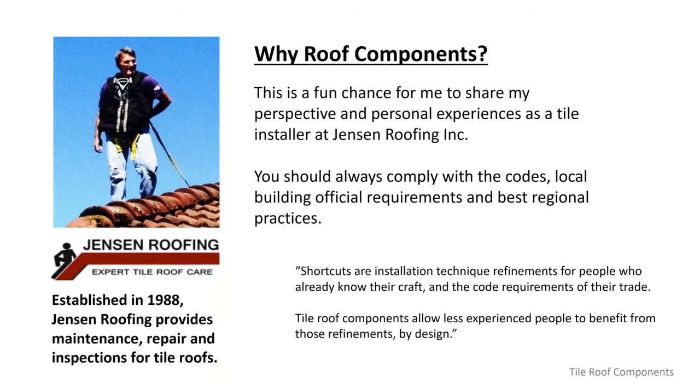I actually adjusted this presentation a little bit because of the level of experience and knowledge that we have here. I don't want to be rudimentary, but I do want to share some of my insights.

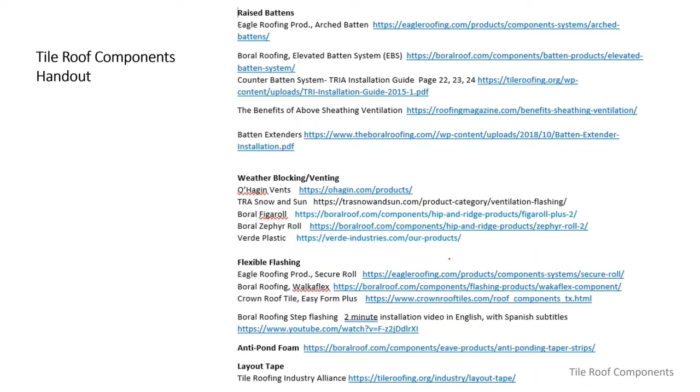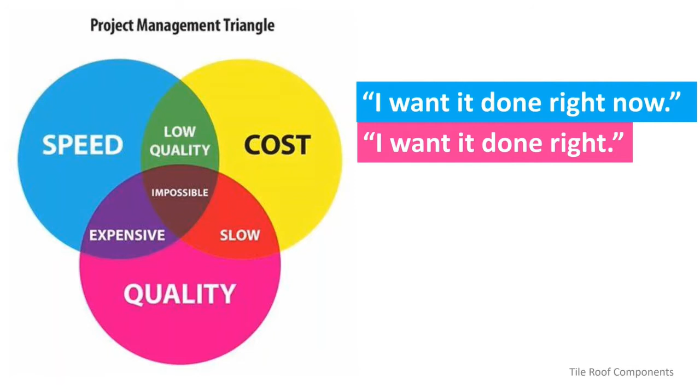So we're going to take an approach looking at the project management triangle, and the rule of thumb is that you can get 2 out of 3. It's speed, cost, and quality. So that means if someone says, I want it done now, they're making their two choices. They're saying, I want speed, I want it done now, but I also don't want to pay a lot. That means he's going to get a low quality outcome. He's going to get it fast, and it's not going to cost him a lot, but it's going to be low quality. We might say, I want it done right, and I want it done right now, which in this time is a very tough ask. But the reality is, if you want it done right and you want it done right now, it's going to be expensive. The cost is one thing you won't be able to control as easily, but you're going to get a good job, you're going to get the quality.

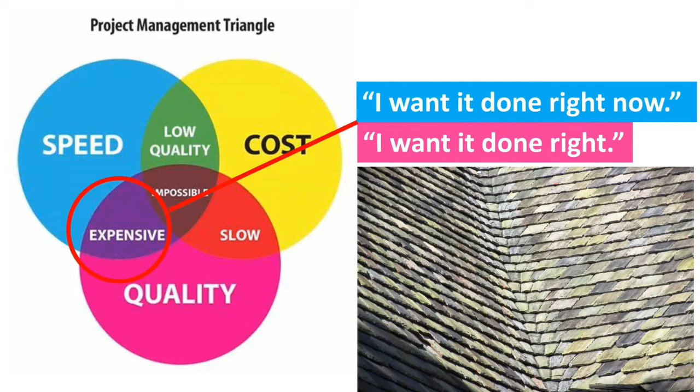That is a Ludowici roof on Duke University, a fantastic job about 3 years ago, down in Raleigh, North Carolina. So when it comes to tile roof components, we say that they enhance the quality of the roof by increasing the function and longevity. So when we use words like quality, function, and longevity, we're obviously in the quality component of the project management triangle. We're talking 100% about the benefits to the building owner: longer life, lower maintenance, energy savings, improved aesthetics. There's all kinds of benefits that come with tile roofing components.

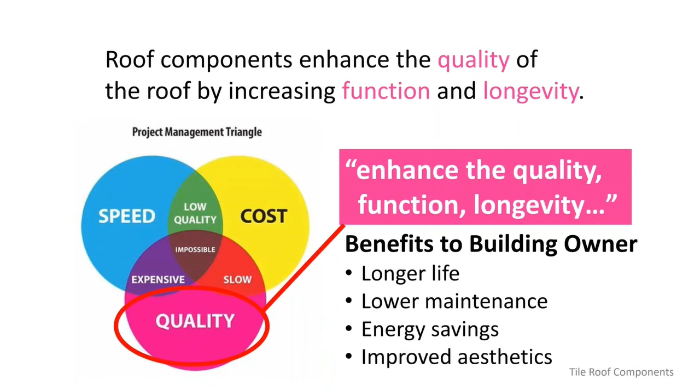The contractor and maybe even the homeowner will look at this project management triangle and say, well, you're telling me we're going to provide quality, function, and longevity. That means it's either going to be expensive, or it's going to take more time, or it's just going to be impossible to deliver at the speed and cost that this person wants.

What I want to show today is that that's completely wrong. And the reason it's completely wrong is because we're only looking at that project management triangle and the equation from the perspective of what we're delivering to the homeowner, which is really great. I don't mean to ignore that today, but what I want to do is talk about us.

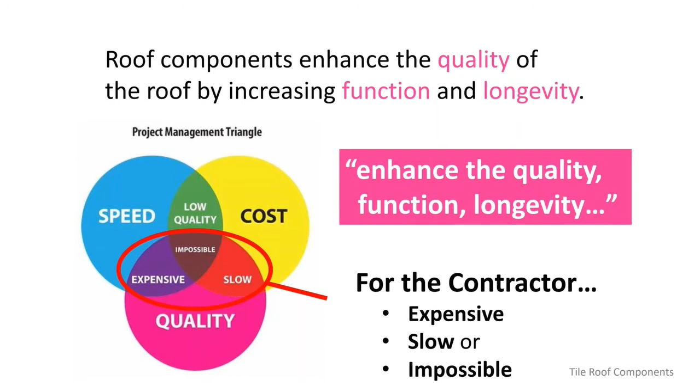And when I say us, I mean the tile roof contractors and installers, and speak to how components help us with the ease of installation, reduce the number of callbacks, can help us standardize our practices and training within our company. It provides us line items for our invoices, for increased billing when it comes to our repairs and sometimes our actual, complete roof installs.

And then if we make a mistake on the roof, if we have a problem, the mistakes are not going to be as painful because the tile roof components help compartmentalize and help facilitate avoiding damage on the roof.

There was a recent Roofing Contractor magazine article, a focus on labor. And if you ask anybody today what the biggest challenge is in construction, let alone roofing, it would be labor. We can't get enough labor. We can't get experienced labor. And second is probably supply chain. So what we're saying in the roofing industry is we can't find people to put on the products we can't get. It almost is a problem that cuts itself out of being a problem.

But in looking at Soprema, they were the sponsor of this. Now, Soprema is a commercial company, but there was something about part of what they said. I highlighted the words that I thought were important to our component talk today. I pulled them out, and I added 2 words at the end: The labor shortage is why creating products that provide time and labor savings, that combine steps, providing simpler application methods to eliminate excess labor, and my add is smart.

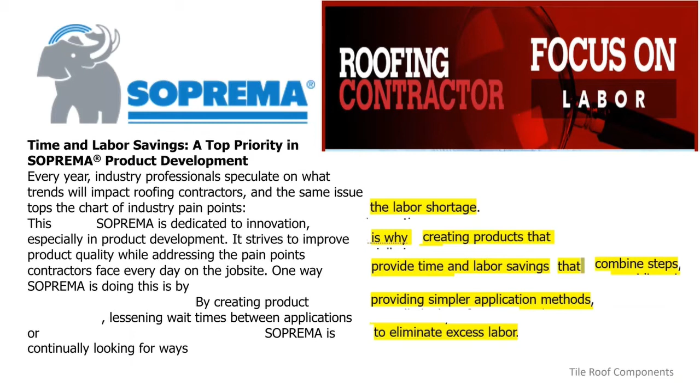That's what we do when we buy components. We're actually buying the reduction of labor needed. And so they make our life easier. It also makes less experienced labor capable of doing work that we want done up on the roof.

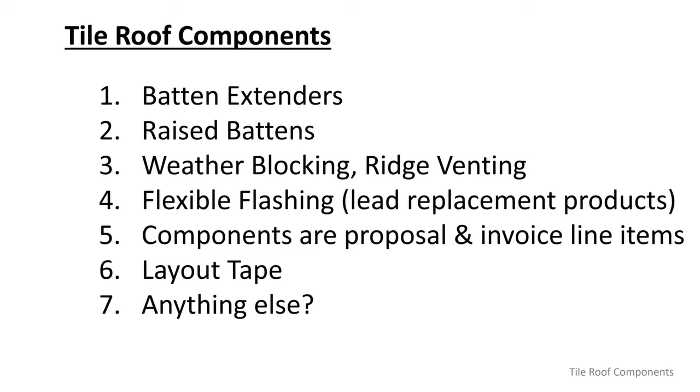So let's rip through some of these components. We're not going to see all of them today, and I hope you'll add ones you think are important and send those to us. But we're going to look at batten extenders, a raised batten system, weather blocking and where we can do ridge venting, flexible flashing, which is really common now, replacing lead as a component in roofing and tile roofing. Components are both a proposal and an invoice line item. We'll look at that. Layout tape, something that can speed up layout and make it a little more, ensure a better outcome. And then anything else from you all, use that question feature on the GoToWebinar.

So first, let's take a look at batten extenders. And these components are not in the order of value or importance. They're in an order that I just thought for less experienced people, we kind of see a progression. But again, we've got a very experienced group of people on the line today.

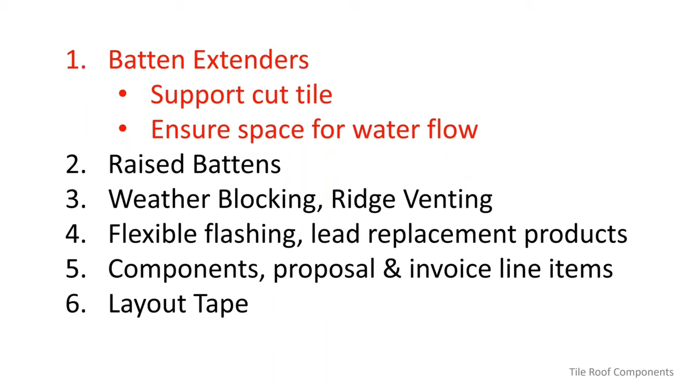So batten extenders, what do they do? They support cut tile, and they ensure space for the water flow underneath the tile. So if we look at what would be maybe a typical installation in Southern California where there's no battens being used, we've got a low profile tile with a continuous lug, and we've got a pan flashing that's designed to run the water down the roof and encapsulate it in that pan flashing until it gets to the gutter.

Well, this tile and that pan flashing have a problem with each other, and what unfortunately happens a lot is a roofer might just smudge, push, crunch down that raised hem on the flashing. That's very important to facilitating the water getting off the roof. So obviously we don't want to do that.

Other times the roofer may take his hammer, and I've done this on new construction when we're dealing with fresh new tile, you might take your claw hammer on a framing type hammer and chunk out the weather check on the tile. I've reverted to cutting. We've seen issues where we can put fracture lines or fractures in that tile that they'll develop later and be breaks.

So once that tile is down where we want it, we're able to put a fastener through that pre-punched hole in the tile. But when we get to our second row, now we're looking upslope, you can see that our offset tile, our half tile, if we put a fastener in that hole, it's going to go right through the pan flashing, and we can't do that.

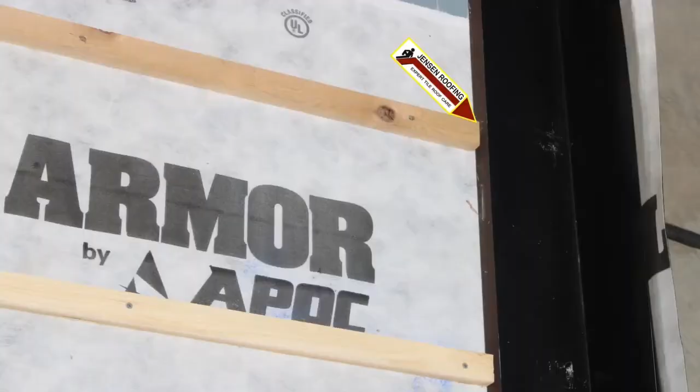So we're going to have to wire tie that tile, or do something to secure it so it doesn't slide in that pan flashing. Even if we're using 1x2 battens on the roof, we still can't run those battens right out into the pan flashing, so we're still dealing with figuring out how to attach that tile. Sometimes we'll use adhesive, concrete adhesive, or concrete and clay adhesive.

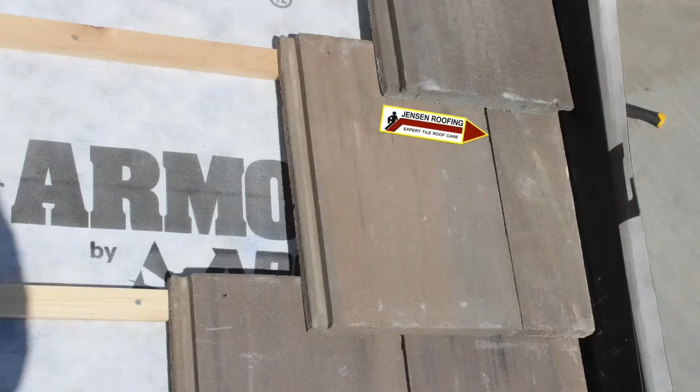But you can see that the tile is still drooping, so it's going to fight against making a good connection there. It's going to be a little bit disheveled, and eventually it may slide. If the adhesive doesn't make a good bond before the tile is set, it may slide down, and then Inspector Paul will be pointing that out in his reports.

Another challenge with the cut tile, which we see at the sidewalls where they need to be supported, or at the valleys, is that once you've cut a tile, it's a lot harder to use any kind of a hammer or slate tool to chip out the weather check. You're more likely to break or fracture the tile, so at that point you often have to cut them to do that.

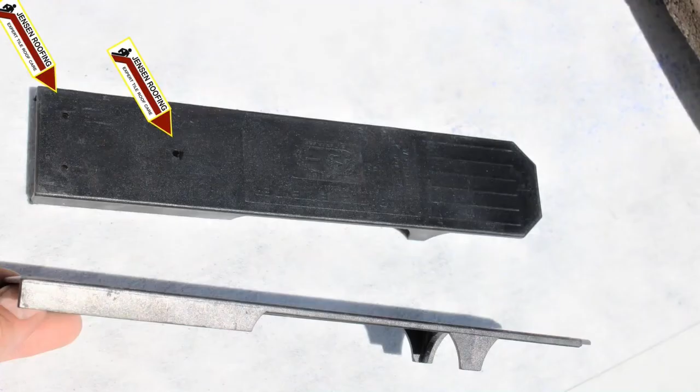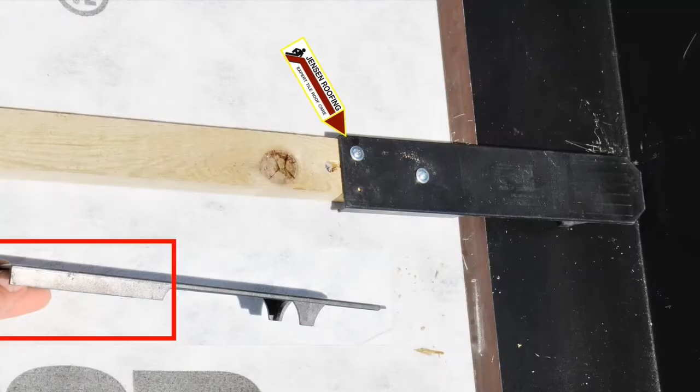So one solution is a batten extension or a batten extender. If you look at this one, you see that there's actually 3 pre-drilled holes in the batten extender. This is a 10-inch batten extender, and the first several inches are kind of a U shape, and that U shape fits over the top of the batten. I typically put a fastener in 2 of the holes and fasten it over the top. You can see from the side down in the red box how that U shape fits over.

And then the extension goes into the pan flashing, and there's a couple little legs that keep the plastic part of the batten extender up in the air. When we set a tile on it, the lug is able to fully engage on that batten extender, so we don't have the same problem with sliding. And if we were going to use adhesive to bond that to the adjacent properly fastened tile, that tile is going to be lifted up in a position where that adhesive will make good contact. Clearly you can see there's plenty of space for the water to flow underneath the tile.

So that's a 10-inch batten extender, and we've also got 18-inch batten extenders made for our valleys. They're the same, just longer. Again, you can see that we're installing a concrete tile on a 1x2 batten, and the batten has to stop at the flashing, and the tile then actually droops into the valley trough. As you roofers know, this is the easier side of the valley where the underlock of the preceding tile helps support our tile. It's even more challenging on the other side where we're coming out of the valley and those tiles just want to drop flat down into the valley.

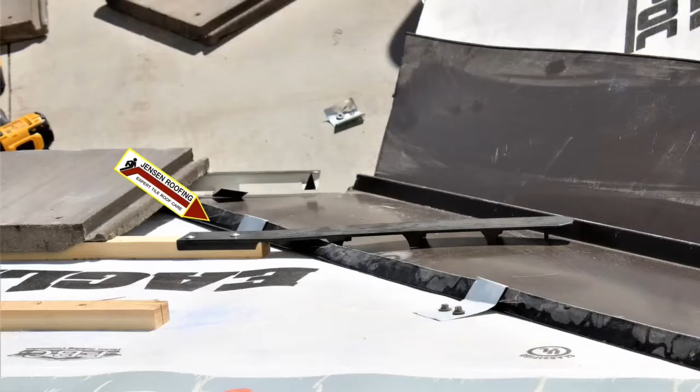So if we install a batten extender, same 2 fasteners that we used before on the sidewall, extend it out into the valley flashing, the little feet and legs keep it up in the air. The 18-inch extends right out to the center of the valley, and then we can put our tile and rest it on that. You can see the nice even plane of the surface of the tile. That's going to make a difference in the aesthetics from the ground on all of that tile. In addition, you can see the cavity between the flashing and the bottom of the tile, so we're not going to have the same issues with the blockage of tile.

For us, it's very common on that standard tile valley with the hem or the return, very common in the Northwest, Oregon, Washington, and Idaho, where tile roofs were installed with low profile tile, which is very common up there. And now we're seeing low profile be more common across the country, that modern look.

So we get a call for a leak repair and go out and find that there was nothing done other than the valley tile just laying there in the valley. So our role in a repair like that is we go out and we solve the problem. We find the blockage, we'll replace, pick up the tile, clean it out, and install maybe 3 or 4 rows of batten extenders. We'll send the homeowner a picture like this. Maybe we'll throw in a debris screen if there's a tree around that helped contribute to that.

But now we're going to solve that problem for them immediately. We've got our repair call, our service call, and we charge them for the products that we installed. Then we'll send them this picture along with the invoice and tell them, tomorrow I'm going to send you a proposal to finish that valley all the way up the rest of the 20 feet and the other 4 valleys on your roof. We'll give you a proposal if you want to upgrade that. The pictures we'll send will be the debris blocking the valley, the debris cleaned, and the batten extenders installed.

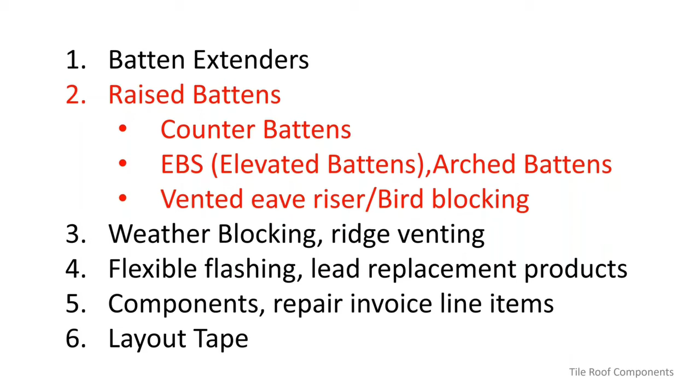So we're going to look at counter battens, which raise up the horizontal battens, the EBS, the boral elevated batten system, arched battens, which is the eagle system that allows the same type of airflow, moisture, and condensation to run downslope. And we'll look at some of the vented eave risers and the bird blocking at the eave.

So first, if we look at the TRI manual's low slope ventilated eave roof eave detail, you'll see that there's a lot of components or parts to that system. We have it under low slope because under 3:12 it'd be required to have a counter batten system or a raised batten system. So in the Northwest, we see a lot of lath put down vertically with horizontal 1x3s or 4s. And those systems actually do pretty well.

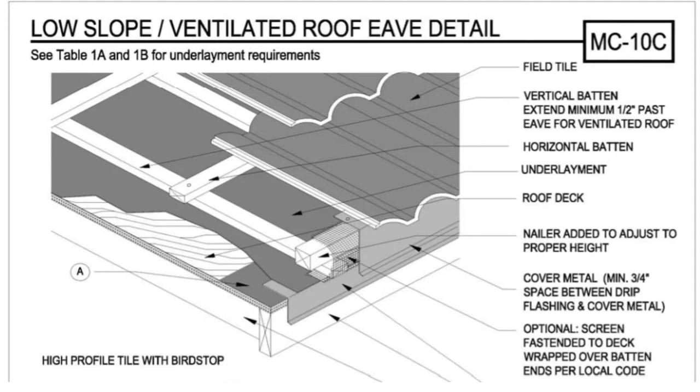The airspace is very helpful. But you're installing verticals, you've got horizontals, you've got the little eave detail where we're bringing the air in. There's really 3 components to a raised batten system, which encompasses raised batten, counter battens, EBS, arched battens - anything that takes those horizontal battens up off of the roof deck, blocking water flow.

We've got our air intake to draw air in. We've got our exhaust to allow that air to exit up at the top. That creates convection, so we get airflow underneath the horizontal battens and underneath the tile.

And we also get the benefit of drainage, so that if a branch breaks a tile before we can get up there and repair it, that water can get off the roof. If we have a severe storm that blows water past the tile for a short period of time, that water can get off the roof. In cold, humid environments where moisture-laden air goes underneath the tile and then cools down at night and condenses, that condensation can run down and get off of the roof.

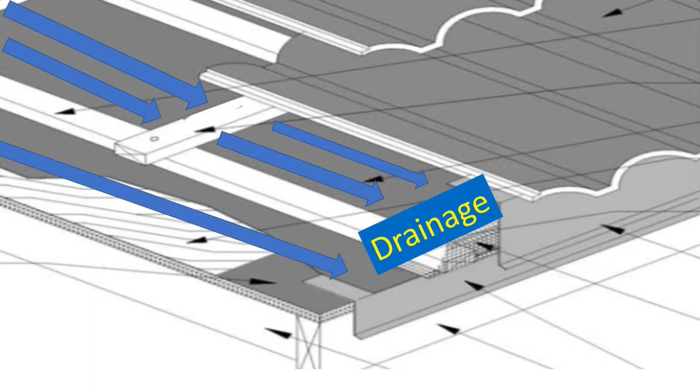So there's advantages to this counterbatten system. The challenge with it is that if you look at all the arrows and the description and the training it takes to get somebody to do it right, it looks like there was a cowboy and Indian fight. So that's a lot of direction, and today components reduce that to 3 parts.

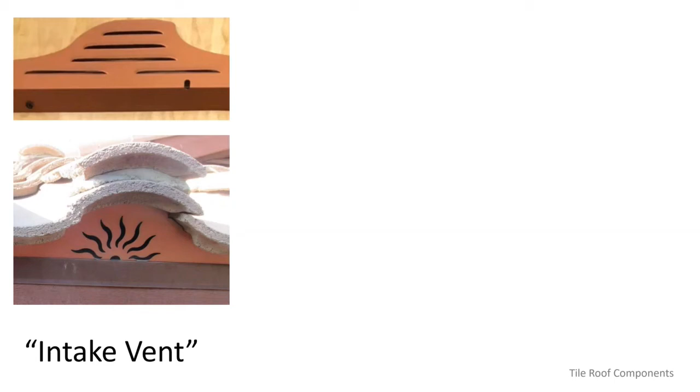We have our intake vents, which are integrated into your eave riser metal. They're installed the same way that your normal eave riser metal is installed, except there's ventilation - there's the ability for air to flow in. We have our exhaust vents, which can be horizontal ridge lines, or even hips, with rolled vented material for weather blocking. Also, O'Hagin vents or roof vents can be used to exhaust that air up high. And then we have some type of batten system that raises the horizontal battens up off the roof deck and allows for airflow and drainage underneath the tile and underneath the batten.

So really we've got 3 main parts to a raised batten, above-sheeting ventilation system, and the 3 components are things that we're already installing in one form or another.

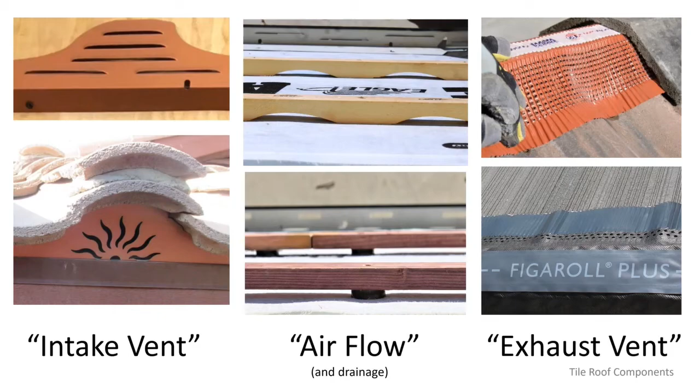If we look at the installation of one of these systems, you can see this is a Boral EBS system. The battens are able to be extended right out into the pan flashing. You can see down there at the eave, there's a ventilated eave riser. You see the small weep hole, you can see the white metal through it, but then you can see the elongated ovals, and those are the air intakes for the underlying above-sheeting ventilation system.

So if we look at those battens that are extended out into the pan flashing, we would think that would block the water flow if we didn't know what we were looking at. But the reality is those EBS battens can extend out there because they're supported by the little black riser. And look at the smoothness of the top of the tile.

That's just not the way it works if we're propping, wire tying, and gluing tile together over there. That smoothness will transmit across, especially with low profile, especially with flat surface. You see deviations in that. So having that support is critical both for the aesthetics and also the function to keep that batten up out of the water flow.

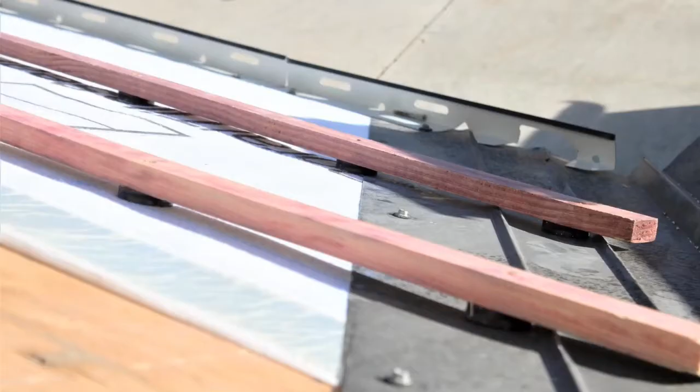Same thing over at the valley. The battens are able to extend all the way out into the valley and out in the middle of the field. Same thing, the battens are raised up, so that's going to ensure our airflow and downslope drainage ability for any moisture or condensation that gets underneath the tile.

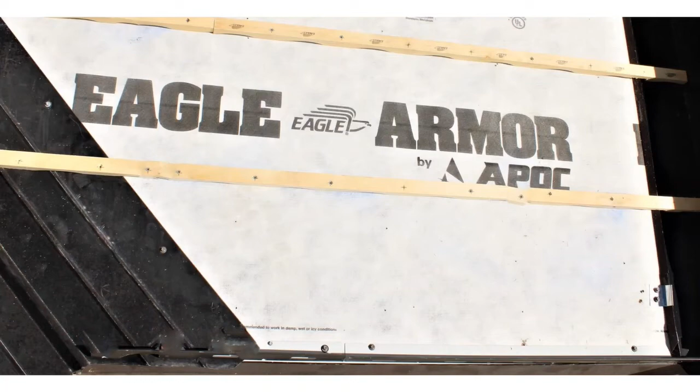Same thing with the Eagle arch battens. We've got the ventilated eave riser. The battens are able to be fastened to the deck. You can see at the sidewall, the same thing, the tile is in a nice even plane from where it's above the roof deck on the batten to where it's above the flashing on the batten. There's room for the water to flow down through the pan flashing.

Same at the valleys, the water can flow down the valley flashing underneath the tile. The tile won't be blocking the water flow. And out in the middle of the field, same thing, we've got airflow and water flow drainage that can go down slope, and air that will be part of convection that helps with our above sheeting ventilation system.

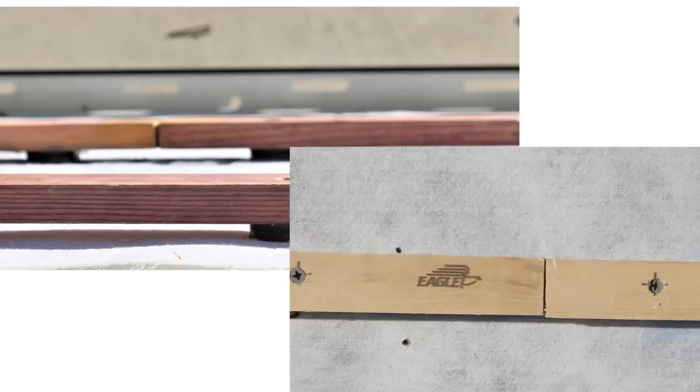One thing you might have noticed in the pictures is that there's not a gap in between the ends of the battens. So a couple things, we can install 8-foot long, 10-foot long. These battens that are raised up off the deck can be as long as you want. Typically they're 4 and 8 feet, but we're restricted with 1x2s direct to the deck to only 4 feet, and we're required to have a gap in between those battens.

So we're not required to have that gap. It's kind of funny, if you go out and look at some of these installations, you will see that either by habit and partially by not understanding the reason for that requirement, you'll see roofers providing that gap in these raised batten systems. It's not a big deal. It's just something to point out that understanding the why of things is very helpful. So in this case,

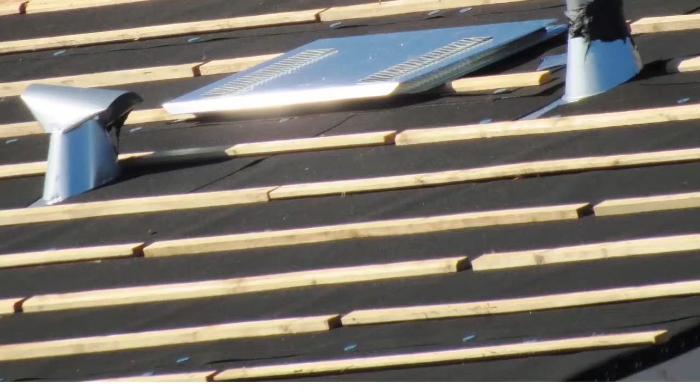it's just important to realize we don't have to have that gap. One of the reasons is that when you're working directly with a homeowner, they may not understand the reason for that gap either, and they may have a question if there's anything that looks inconsistent. So if there's great consistent spacing, a finger that's put between the batten that's the same finger, or a 1x2 turned on edge that provides that half-inch gap.

But if they're random like this, it is something that might draw attention to them, and it's just very difficult up on the roof to keep all of those rows in line. We don't have to, it's not required that the spacing be in line. But when we see something this random, like you see here, it's something that you might have a question from the homeowner about. So that's a lot of information about the batten extenders and the raised batten systems.

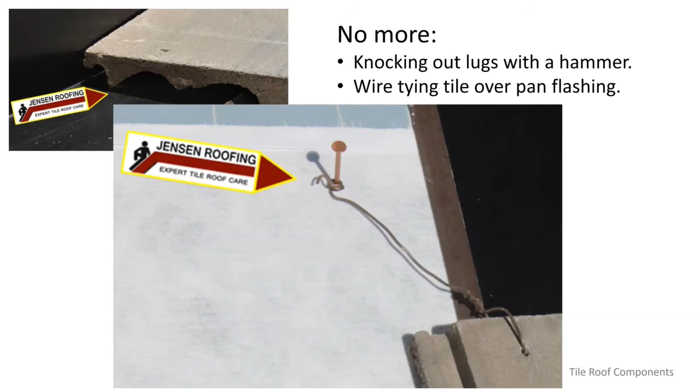But what they allow us to avoid doing is no more knocking out lugs with a hammer, no more wire tying the tile because of the valleys or the sidewall flashings. We won't have any more drooping tile at the sidewalls. We won't have drooping tile into the valleys blocking the water flow. We'll have no sliding tile due to failed adhesive because the tile are actually able to engage with the batten.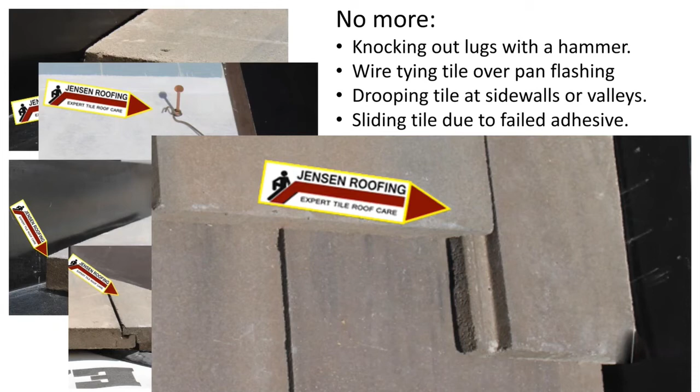We won't have broken tile due to us fracturing them when we're modifying the tile so that it can fit around our flashing. We won't have leaks from improperly installed battens because the roofer knows, hey, I got to support my tile, so I'm going to go block the flashing to support my tile so it looks good at the pan or at the valley, same detail. Those can be really horrendous leaks that are drawing water back in underneath the tile.

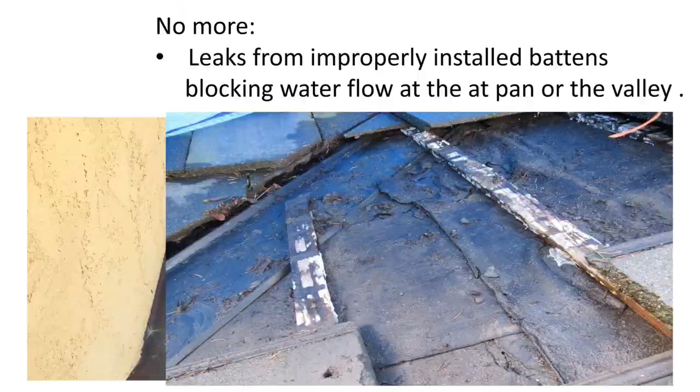So we avoid that. So all of the benefits to the building owner are still there: longer life, lower maintenance, the energy savings, the increased aesthetics.

As a contractor, talk to your manufacturer sales rep of the product you're going to be using and selling. They've got the literature, the knowledge and understanding of their specific product, the features and benefits, and let them help you sell that product with their knowledge, because it will benefit your customer.

Your manufacturer technical reps are also available to help you with training. There's some great programs, and they're eager to help you train yourself or your people to properly install the components. But I like to say that I buy components to make my job easier, and I sell components to make the roof better. So there's a benefit in both.

The components make my job easier as an installer, but they also make the roof better. So if the homeowner is willing to help pay for some parts and pieces that make my job easier, I'm all in. The benefits to the contractor include ease of installation, fewer callbacks, standardizing practices and training in your company, invoice line items helping with increased billing, or at least being able to bill for what you're actually doing on the roof, and mistakes can be less painful.

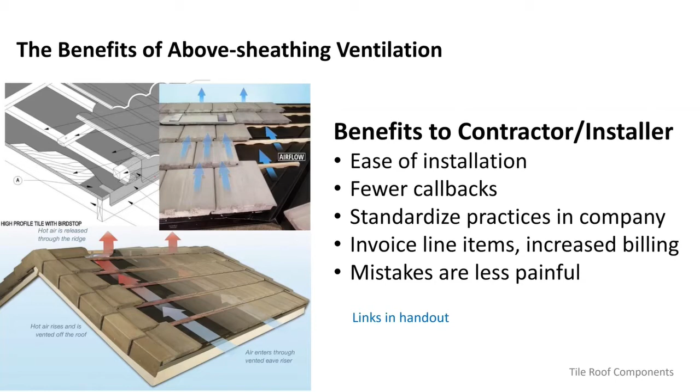But think about it this way too. After the dry-in, once we're done with our underlayment, it's time to start the process of shifting into tile mode. To train a new employee, for someone to go up on a typical roof with underlayment installed, you're going to install 1x2 battens direct to the deck.

You want to teach them layout, and then they're going to chalk lines and fasten the battens on those lines. They're going to have to end-space the battens. They need to know that's a requirement, to end-space them a minimum of half an inch, and they need to know not to use battens longer than 4 feet.

They need to know not to put the battens in the pan, don't put the battens in the valley, don't put fasteners into the pan flashing, don't put fasteners into the valley flashing when you're trying to secure a tile. At the sidewalls, you've got to prop or chunk or cut or glue or wire tie the tile so they don't slide, droop, or block the water flow. And the same at the valleys.

If you want those tiles to look nice and level, you've got to prop or chunk out the tile or glue it, wire tie it so they don't slide or droop and block the water flow also. So those are all the things you need to know if you're going to do a direct-to-deck install with 1x2 battens and keep the proper water flow in your flashings.

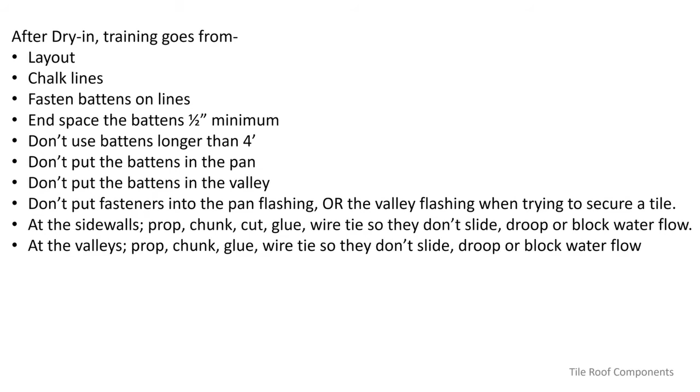But if you're using a raised batten system, there are all these other benefits it provides to the homeowner. As far as training your employees, even if they don't know about those benefits, the training boils down to layout, chalk lines, fasten battens on the lines. That simplicity allows a roofer with less experience to be utilized on the roof sooner.

So let's take a look now at weather blocking and exhaust venting. We've covered the intake, we've covered the raised battens and how they affect and provide airflow, but also they provide an abundance of water capability flowing in the flashings underneath and keeping the tile in an aesthetic manner, nice and smooth and level without drooping and falling in.

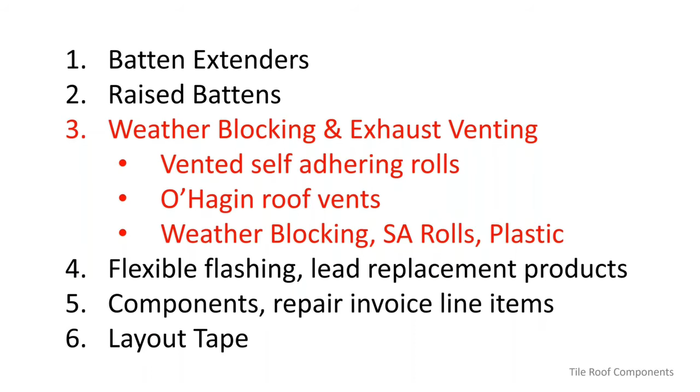Now we're going to look up at the top part of the roof with our weather blocking and exhaust venting, our vented self-adhering rolls, the O'Hagin roof vents, weather blocking and its impermeable self-adhering rolls, and also plastic rigid material. So there's a variety of different products out there. These are both the Boral and the Eagle products. TRA Snow and Sun, they're on the call today. They also make a variety of products.

There are products out there that will help you move more quickly up on the roof. And a lot of times, as we see a stronger move away from concrete or mortar weather blocking in a lot of markets, these products can be super helpful.

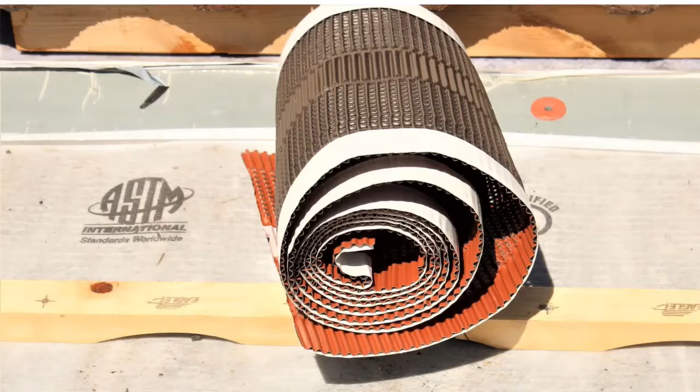So let's look at this roll from Eagle. You see the white is a release strip, and there's a sticky strip underneath there, and that roll will fit over the ridge nailer board. It'll form over perfectly, there's kind of creases in there, you just push it down, and it makes a nice angle down.

The perforations will allow air to migrate out, which will be the draw for our under sheathing or under tile ventilation, above sheathing ventilation. But those perforations will also resist wind-driven weather and rain once installed.

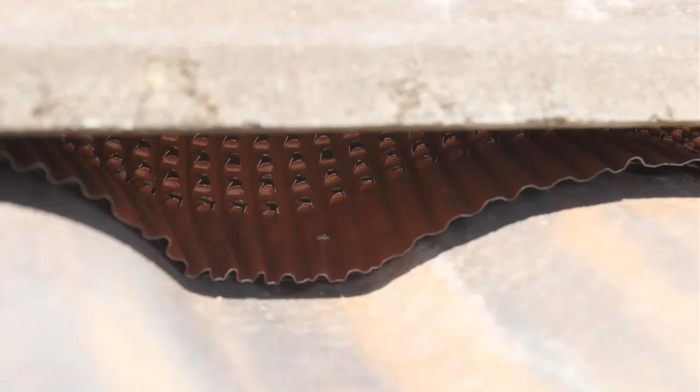The bottom, where the sticky strip is, is corrugated with an up and down nature to it. That allows us to avoid stretching the material, because that ability to feather it out over the low parts and high parts, where it has to travel a little farther or a little less far, stops the installer from stretching the material and having it resist sticking to the tile. Once installed and we put our ridge cap on, the material stays in the shade and you really don't even know it's there.

But they're color coded. There's a variety of different colors and a variety of different products that you can find that will help you there.

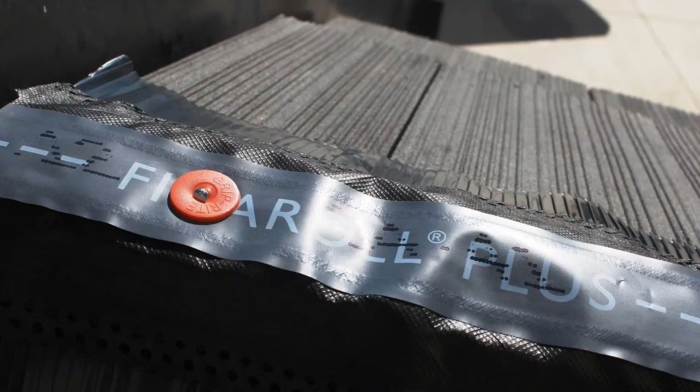This is the Boral product. It's a Figaroll, vented product. One thing I like about that, as a person who does a lot of repairs and works alone, is I can put a hammer tack in one end, roll it out 10 or 15 feet, pull it snug, and put a tack in the other end. So I don't have to fight with it at all. I'm not moving along slowly like with mortar or with plastic.

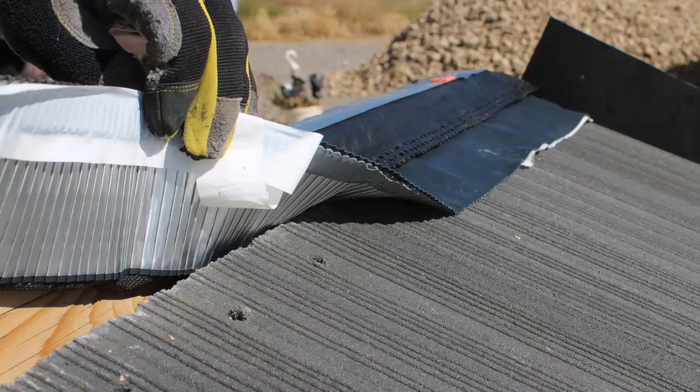This is a mock-up, and I'm done on the right side, but on the back side I'll probably just dry it in for the night and come back tomorrow. On the right side, I can go ahead and pull the release strip off and seal that weather blocking down. So I'm dried in for the night, able to leave that side of the roof finished, knowing I'm half done, and tomorrow I'll come back and finish the back side.

That's about how many squares I do in a day now, about 1 1/4 when I'm working on a mock-up. But it's just the same on a big roof.

Another way to use those rolls is, in our market in the Pacific Northwest, we're required to have raised battens. The cool, humid climate really benefits from raised batten systems because we have a real moss and algae growth issue. With that air movement, the tile dries out much more quickly, and the underlayment stays a more consistent temperature and stays damp for less time.

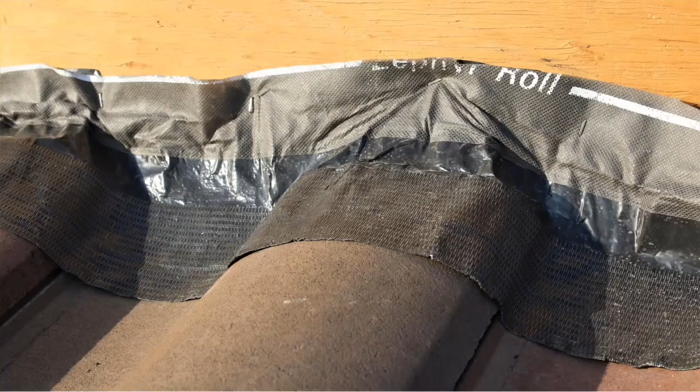So we want to make sure we have ventilation at our head walls also, not just at our hip and ridge. I'll take some of the high profile roll roofing or roll weather blocking made for high profile tile and just cut it in half right down the center. Then I can fasten it or secure it to the head wall, stick it down to the tile using the release strip, and then put my roof to wall flashing over the top of that.

Again, the weather blocking kind of disappears into the shade, but we've got protection from wind-driven rain, and we've got our ventilation up there.

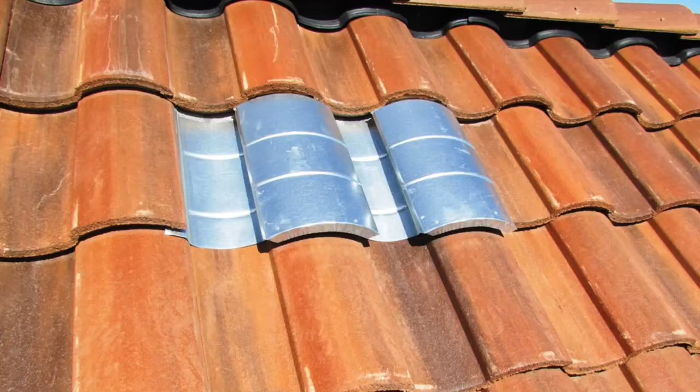We can also exhaust the air through regular vents in the tile roofing. In this case, you see there's plastic weather blocking up above, and we're using O'Hagan vents to actually exhaust the air as part of our above sheathing ventilation program.

So the O'Hagan vents, you guys are familiar with these. One vent replaces 2 full tile. We can paint them to match the tile color. What I like about products like this is, as a salesperson...

I use the manual. The manual gives me credibility. The manual is the credibility for the tile roofing industry. If you're not referring to the manual, you just can't be a tile roofer, because it is the Bible of tile roofing and of the installation.

You see that the O'Hagan provides the deck flashing and the tile level flashing, just like the manual. So if I'm sitting down doing a presentation, I'm able to show them those types of details and show them the products I'm going to be using.

It helps me later when we get to the point of maybe competing with somebody, and the customer can realize I'm following the rules, I'm doing what we're supposed to be doing, and I'm backed up by the industry and by my manufacturer that endorses that manual.

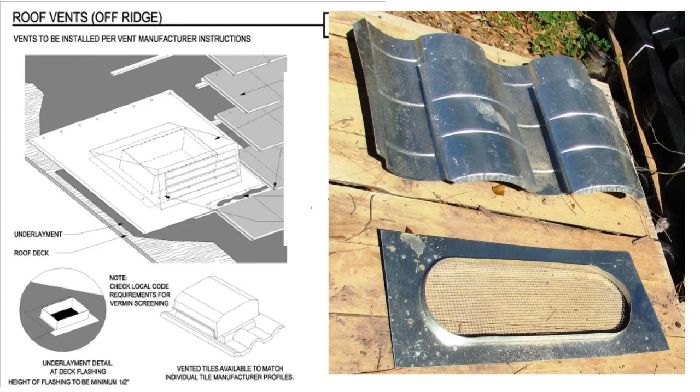Okay, up at the ridge, there are times when we don't need ventilation out of the ridge.

Maybe we're using the O'Hagan vents, or maybe we just don't have a ventilated system. There are also self-adhered weather blocking rolls, a variety of different types.

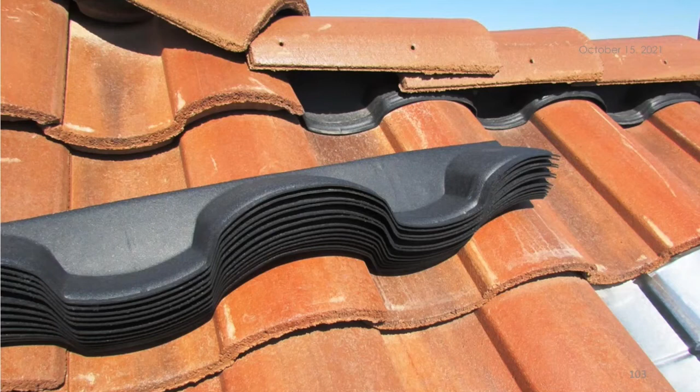Another way that's become more common, and I'm seeing it spread across the country to more markets, is the plastic weather blocking. This is a Verde product, out of Phoenix, and they make weather blocking for every profile and manufacturer that I'm familiar with. They also make the plastic weather blocking for the hip and ridge, which is a pretty neat detail. So there's a variety of different components for weather blocking, from vented to rigid like the plastic, and solid rolls that are impermeable.

So next we're going to look at flexible flashing, and this is really something that has evolved. In the last 10 years we've gone from seeing it used sparingly to seeing it used very heavily. It's a lead replacement product as we move away from using lead up on the roof.

It can be used for step flashing, for transition flashings, which is transitioning water from under the tile back to the surface of the tile. And at those points, we're going to use anti-pond foam.

Also soaker flashings, big flashing where a valley terminates on the roof. Say there's a dormer and the valley terminates on the roof, and we need to pick up that water and make sure we put it on top of the tile downslope. We're also going to use some anti-ponding there.

And then flashing junctures, places where our flashing meets, maybe two valleys on two different slopes meet up at a peak. We'll look at that.

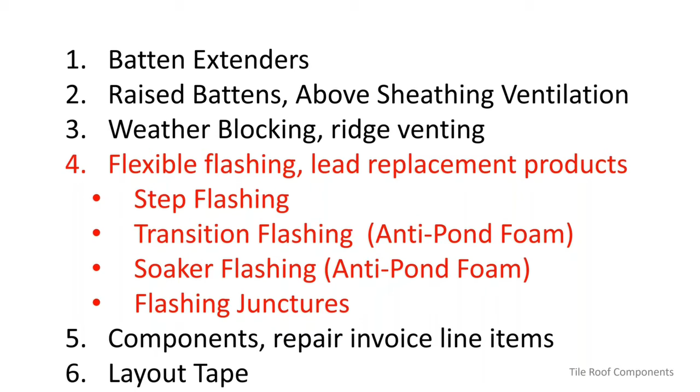So again, there are a variety of different products. You've got crown roof tile, they make Easy Form. Wakaflex is made by Boral, a Westlake company, and Eagle Roofing Products has the Secure Roll. All of these products work great for the transition flashings and step flashings and all kinds of details on the roof.

The example of step flashing, it's important to understand that with tile roofing, it's going to be different than shingles, shakes, or slate, because we're not a two-ply roof like those are. We don't overlap more than 50%, and the step flashing are not going to be hidden from the surface of the roof like they are with those products.

You can see on the left, that's a 1915 Ludowici tile installation that I had maintained for a long time. It was part of a restoration project in 2017 where the entire roof was lifted and about 85% of it relaid. The failure point, if you can say the failure point in a 100-year-old roof, was the sidewalls of the chimneys and the second story buildings.

They had used pan flashings, and they'd been a problem. The long-term maintenance guy said from about 70 years old on, they became a problem. So he'd been around a while, and the consultant and the building owners decided, let's go back with step flashing. That looks like a good alternative.

So that's what they did. They went back with step flashing. It's kind of a bulletproof detail that stops water from going underneath the tile on purpose, avoids the whole transition and water running in the pan underneath the tile.

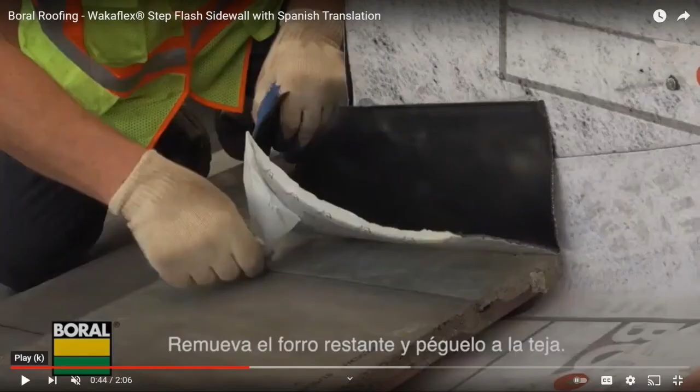Boral has a great video for installing step flashing on a tile roof. Of course, they're using their Wakaflex in the video, but the details and the instruction are good for any product, and it's got Spanish translation on it also.

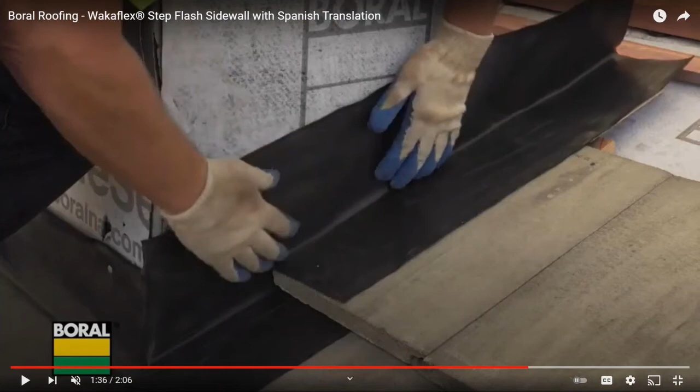You can see the roofer putting down his first piece, and as you see, there's going to be a step nature to the flashing. The best thing about a video is we need to make sure our roofers don't see a 10-foot long piece of Wakaflex or secure roll and just stretch it out and put it over the top of the tile. I know a lot of you have seen that. We want to do true step flashing, and this video does show that.

Something else in the video up at the top is an important detail. You see where the snips are touching that plywood. It's very important with lead, and especially our new self-adhering flexible flashings, that they be supported. When they're on the surface of the tile like this, they're supported. We don't have a problem. We're going to adhere them right to that tile.

But in this place behind upslope, if we want that water from that large piece of flexible flashing that'll be installed up there to make sure it gets up on top of the tile, we're going to need to support that flashing so it doesn't droop or sag over time with expansion and contraction.

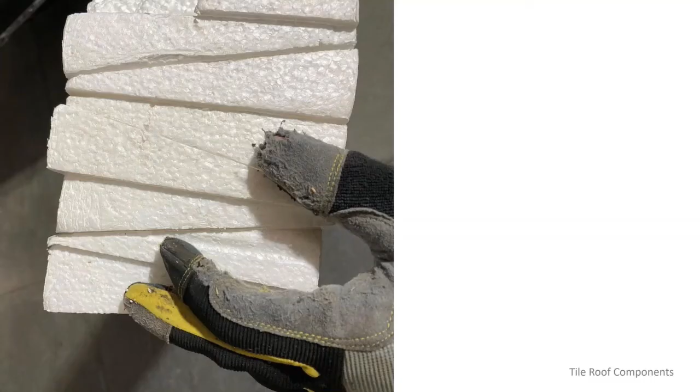So I use anti-ponding foam, and I use a lot of it for repairs. It's typically seen as an element in a raised fascia detail. You have the first row of tile that would droop, so the builder raises the fascia 1.5 inches, and behind that fascia board will stick the anti-ponding foam around the entire perimeter of the house, and then the underlayment lays over that and still has positive drainage, but we don't create that ponding behind the fascia board.

So now, with my great experience, I'm going to show you how I use this anti-ponding foam. You may not all get it because it's just an experienced element. I'm going to pick up the anti-ponding foam, break it, and shove it underneath the Wakaflex or the secure roll or the flexible flashing that we're using.

It's a critical component, and this picture helps homeowners and helps people understand why it's important, and it really makes a difference. There are a ton of repairs where you could go out and do nothing but reshape the lead or the flexible flashing and shove a piece of anti-ponding foam on, and the problem might go away.

But it's just a very nice component to have in a repair vehicle truck, because I guarantee there's plenty of places where if your roofer has it, they will use it, and if they don't, they'll use something else that you may not want to have show up on a picture if the job's ever inspected by a consultant. Broken tile and different ways of supporting that material is just not as effective as something designed for that.

So we're required to use a malleable soaker flashing there to transition that water onto the surface of the tile. And we want it to be large enough so that we don't put all of that combined water into one trough of the tile going down slope. Otherwise, it's going to be a fire hose of water coming down one. So we want to spread that water out into at least 2 or 3 troughs of the tile.

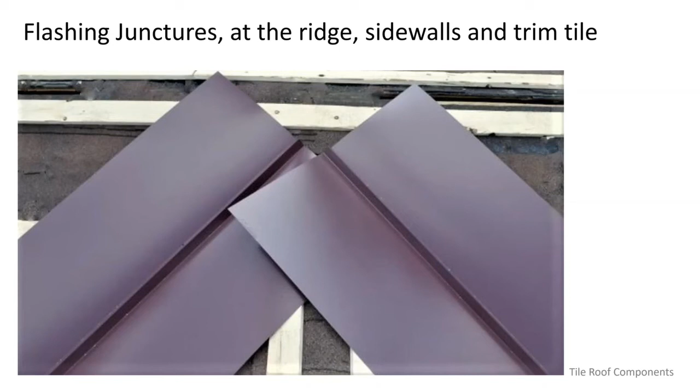So this is the type of valley metal that might be used on an asphalt shingle roof. It's very simple, just a center crown. It's not very difficult to make a couple of cuts and fold the flashing over each side, so you can feel pretty confident you've got a watertight seal, maybe with a little bit of adhesive or caulk right at the juncture.

But for us, if we're using and seeing more use of multi-ribbed valley flashing, it's a battle to cut through that. And just cutting through it is one thing, but to actually try to make some sort of a metal forming of the two up at a peak, it's tough. So what we do is simply cut off flush with the peak.

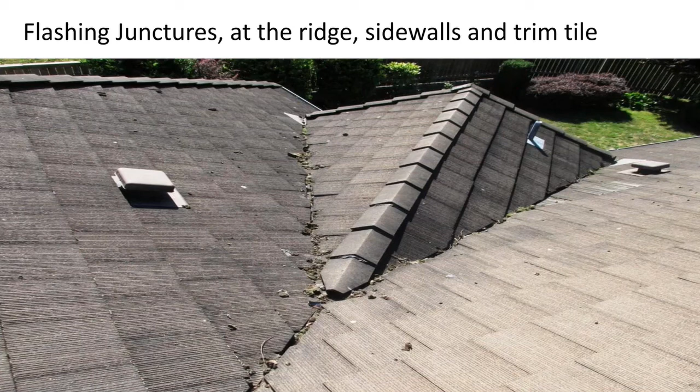Another detail, something like this here, where you've got a valley coming down and splitting into two. No comments about the architect's design, but that's a place where I'm not going to trust my metal skills when I re-roof that on a 5-ribbed valley, cutting that thing up. So I'm going to cut flush with the apex of the ridge, and then drape over once I've got that nice flush meeting of the two sides. I'm going to go right over the top of it with one of the flexible flashing materials and just form it snug around that. Once I'm covered up with my ridge tile, nobody will see that, and I'll have great confidence that that's never going to be a problem for me.

Okay, we've got 2 more sections: components on your proposal, and your repair invoice line items.

They'll see the anti-pond foam. They'll see the pan metal. We always replace 2 or 3 feet of the pan metal at least on the sidewall because we want to be in control of everything there. We don't want to get called back because we missed some small inexpensive piece of material, and by not replacing it, it had a callback for us. And they'll see the batten extenders. We installed X number of batten extenders.

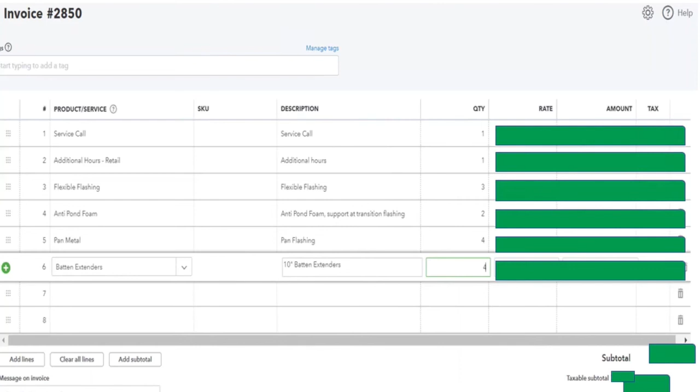I had to block out the pricing because as an industry association, we can't talk about pricing, but I'll just say that for me, this is a very lucrative thing to have my invoices listed and send the homeowner a picture. So there's a reason why I covered them up with green. But for me, it really is a great attribute for my billing.

But in selling, it's also a great opportunity. We don't ever want to negative sell, we don't badmouth people. But FUD is a sales term I learned from my wife, and it's called fear, uncertainty, and doubt. So when I go through a proposal and I'm selling a new tile roof, I'm going to list all of the components that I'm going to use on that roof.

I'm going to show the homeowner a picture along with that proposal, and I'm going to say, hey, this is the anti-ponding foam, it's going to support that flexible flashing. Here's the flexible flashing I'm going to use. Here's the component I'm going to put over the top of that juncture in the valley.

So when the homeowner starts to review their proposal and they say, well, gosh, the other guy's price is better, but I don't see these things listed, I just tell them to go ask them what they're going to do. I'm using the manual to support my sales presentation, and I'm using products made by our manufacturers to facilitate a good installation. Gosh, ask the other guy what he's going to do. What did he say?

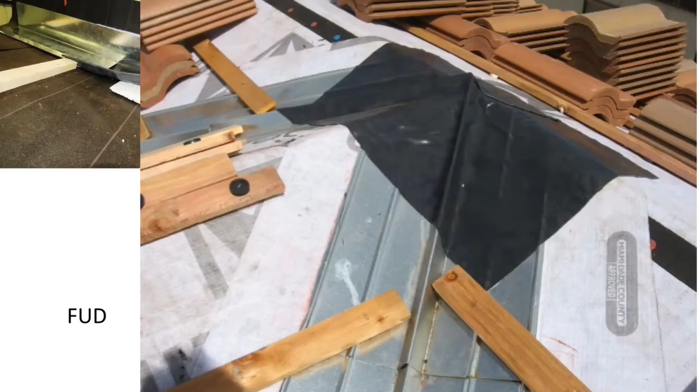The homeowner might say that when they get to a transition piece, they just use some broken tile and shove it underneath there. And when they get to a juncture of these flashings, yeah, they're using 5-rib metal, but they said they just hammer it down flush with a big hammer, and they can make it work. They don't have to use anything fancy.

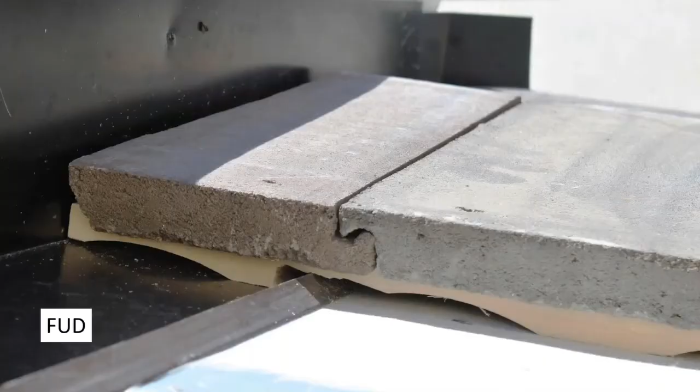But what do they do with the valleys? Are they doing something there, since we're using raised battens or batten extenders? Well, again, they said they throw some broken tile in there and prop it up, and they're really quality, they glue it in there. Or maybe at the sidewalls, the same thing, they glue it or they break it.

Those things, it's not negative selling. It's saying I'm doing it right. I'm using the manual, I'm using the installation instructions, which is the clay and concrete roof tile installation guide. I'm using the parts and pieces the manual and the manufacturers provide me. I'm purchasing those and I'm installing this properly. I want to compete against people doing the same thing. There's nothing wrong with getting that out there and letting people know that you're doing that.

Okay, lastly, we're going to look at layout tape. We're going to look at just one component. We're not trying to teach you how to do layout today. Most of you are already familiar with it, but I really want you to see something and know, kind of a little bit from a personal standpoint.

At my age, I've been roofing for a long time, and I work and train and have a lot of contact with people my age who have been roofing for a long time, but different from me. They had great business skills, and they built their company into something substantial where they really haven't spent time out on the roof for a long time. And maybe the bulk of their learning and their tile experience happened before components really became a part of the industry. To them, you get into that stage where, I don't need to ride to school, we walk both ways, or I don't need these components, we make our own. And that's great.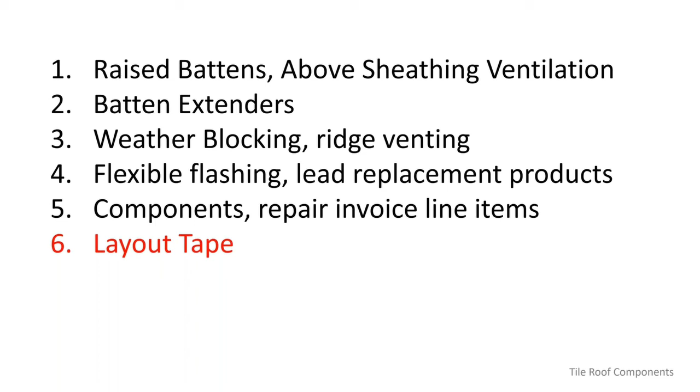So we'll just take a look at that. If you ever got big enough and you were going to buy a bunch of it, we'll give you the name of the company we use. We just want it out there to help facilitate the installation of clay and concrete tile.

So a couple things before we get started on the layout. There's a requirement that we have a 3-inch headlap unless precluded by the tile design, but that's pretty rare. Most always you're going to be required to have that 3-inch headlap. And then the goal is coursing done ideally in even increments. So it's not a requirement, but it's a goal, and it provides a benefit in both function and aesthetics. Won't go into that, but it does.

And then the skill is making that happen, making sure you have your required 3-inch headlap and getting to an even increment in the spacing of the tile. So making that happen is a skill whenever it's possible. We're going to look at 2 different ways. The most common way, and historically roofers have had a marked tape measure. So if they're using a 17-inch tile, they're going to mark their tape at 14 inches. That gives them the 3-inch headlap, and we'll show you how they're going to use that.

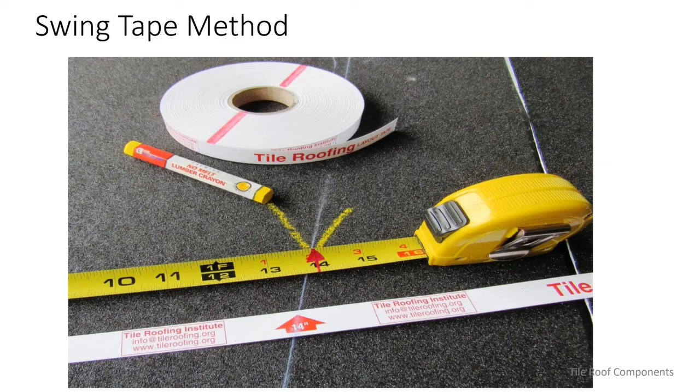We're also going to look at the paper layout tape. So the first thing we do, we get up on our straight gable roof, we look at the ridge line and the eave gutter. We realize, okay, we're using a 17-inch tile. We've always got to know the size of the tile we're using because that's going to determine the maximum exposure of that tile. We're going to figure out where we want to place our eave row first because we want the proper overhang.

Different tiles, even ones that are 17 inches long, have different thicknesses at the lugs, and the slot where the eave riser metal goes can be at different places. So you always want to flip that tile over and do those measurements. But the first thing you're going to do is place that eave row and place where you want your top row, snap those lines, and now you've got a starting point. You've got your ridge and your eave line.

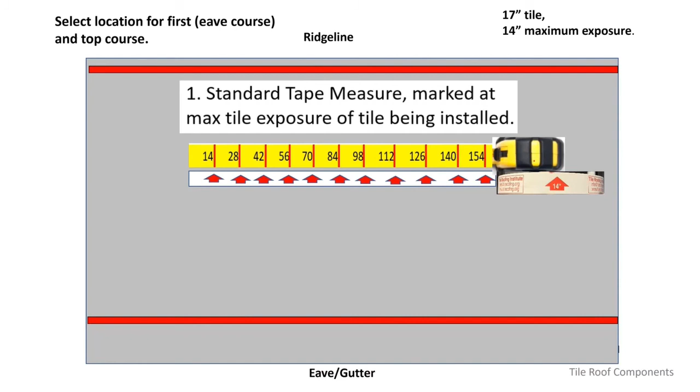Then we're going to take a look at the two different ways. First we'll look at a standard marked tape measure, marked at the maximum tile exposure for the tile being installed. This is a 14-inch exposure today, so my tape measure is marked at 14, 28, 42, 56, 70, all the way up to 154 inches for this example. Then we'll show the paper layout tape, which is also marked at the max tile exposure of the tile being used.

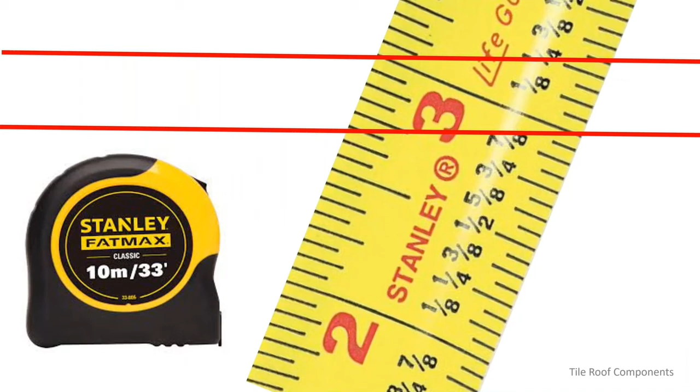One thing I'll point out right away, because my wife pointed this out too, is something we're aware of due to issues that have come up. I love my Fat Max, the Stanley tape measure, but they're super wide, and this can happen with any tape measure, but it's accentuated when you have a really wide one. Look at where the 3-inch mark on that tape measure falls when we're at a diagonal. By nature, we're going to swing the tape to a diagonal because this is the swing tape method, so we just want to be aware of that.

I'll come back to that later. So if that catches your eye and you can't avoid thinking about it, I promise you we'll come back to that detail later.

So what we do is take our tape measure and butt it into our first row because it's fixed, that's our first line. Then we stretch it vertically, perpendicular, up past the top row. If we look, 10 rows at 14 would be 140 inches, and obviously our 140-inch mark is above where we want it to be.

There are a lot of reasons why we don't want to have a short course up there. We'd be cutting off the lugs, cutting off the nail holes. We'd be cutting, and we can avoid cutting. We can avoid all those things.

By simply rotating that tape over until the 140-inch mark on the tape meets that top horizontal ridgeline row that we want. At that point, we've got to do something.

We've got to get down on our hands and knees and start marking a V with a crayon or chalk and transferring the marks from our tape measure onto the underlayment, so that when we pick up our tape and take it down to the other end, we can do the same thing: go vertical, swing it, and then transfer those marks onto the underlayment with a V so that we can then chalk lines across it.

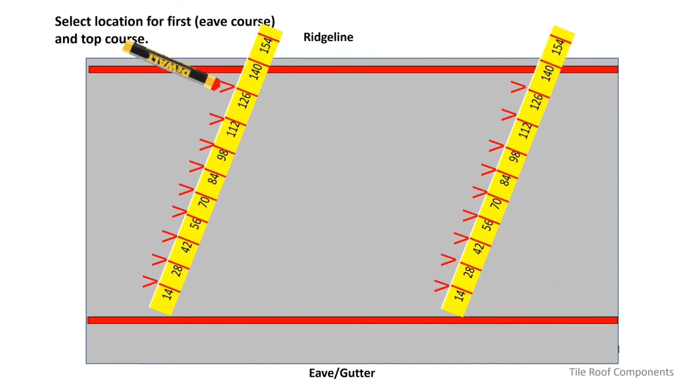So you know the labor intensiveness of just getting down and marking all these V's. It doesn't sound like a big deal, but if it's 115 degrees in Phoenix, if it's a step you can avoid, all the better. And if you're on a house like this, the labor intensiveness of doing that is much greater, so we want to avoid that if possible.

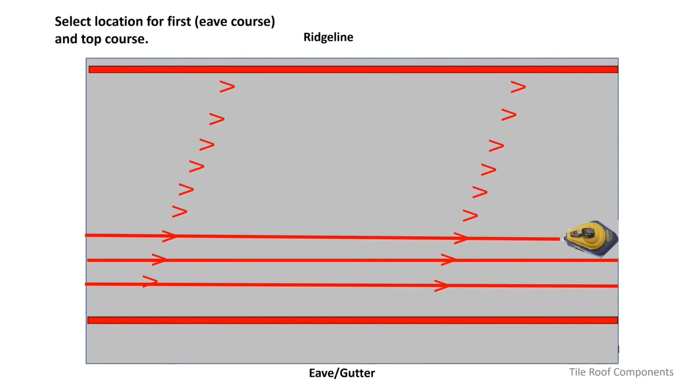Once we've got all those marks, it's pretty quick to chalk lines across them, and now we're ready to apply our battens. So that's using a regular marked tape measure.

Now, if we use the paper tape, we're going to have the same 14-inch marks, but there's no possibility for mistake. I do pretty well with 14, 28, but once you get up to 22 rows, I'd have to use a calculator to multiply 22 times 14 and get it figured out, and mistakes do get made. With a paper tape that's marked, you're not going to have the possibility of that mistake.

We're going to get back to the same place we were. We've got our eave row and we've got our top row, that's where we want those two rows. We're going to use layout tape.

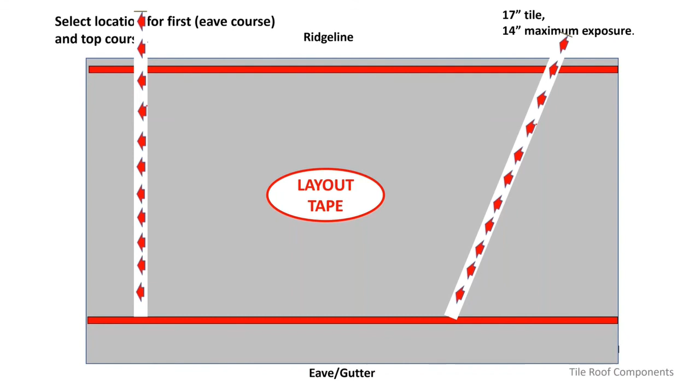We're going to put our first arrow right on the top of our eave row, go straight up vertically, do the same thing we did with the tape measure, swing it over until that red arrow lines up on the top row. Then we do the same thing at the other end of the roof. I go up vertically first always, and then swing the tape over.

And now, no, we don't have to do this. We can skip that because our arrows are already on the paper tape. So very quickly, we're already to the chalking lines point. You really can't beat that.

In addition, the concern about having the tape measure, some people will ask, is that really a concern? I'm not a nickel and dime guy when it comes to stuff like this, but if you really want to know, ask your roof consultant. He's going to say yes. The fear is that if you accidentally have a row or two above maximum exposure, it's something a roof consultant really can't ignore if it's something he put his tape measure to.

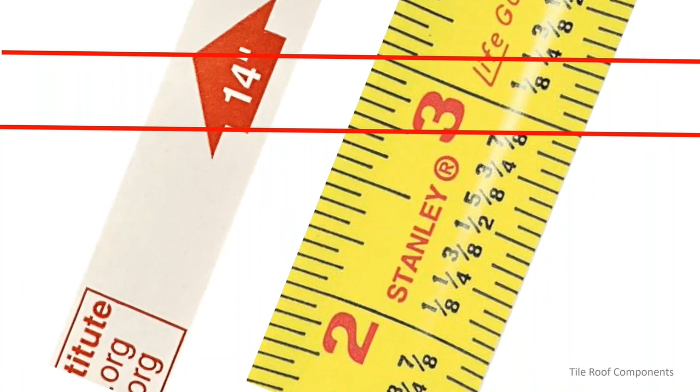So we want to avoid that. You avoid that when there's just a single arrow. So it's very hard to make a mistake with this tape. I won't say it's impossible. Nothing's impossible, but it's very difficult to make a mistake with this paper tape. It doesn't stretch, and the arrows always point the same way.

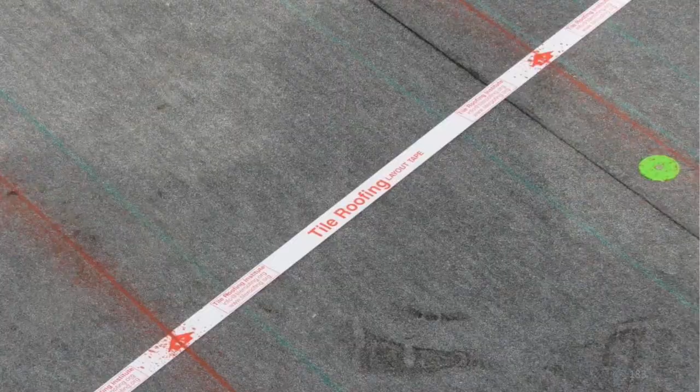We have 3 different sizes in stock: 14-inch for 17-inch tile, 13.5-inch for 16.5-inch tile, and 11-inch for the Ludowici 14-inch tile, all providing a 3-inch head lap.

So then that tape stays behind, it's part of the job. It'll degrade and the wind will blow it around, but it stays behind there. When the roof consultant comes up and does an inspection, it's kind of a topic of conversation if they haven't seen it before. But to me, that's a super efficient way. There's other aspects to that we talk about in our training that really facilitate a good installation.

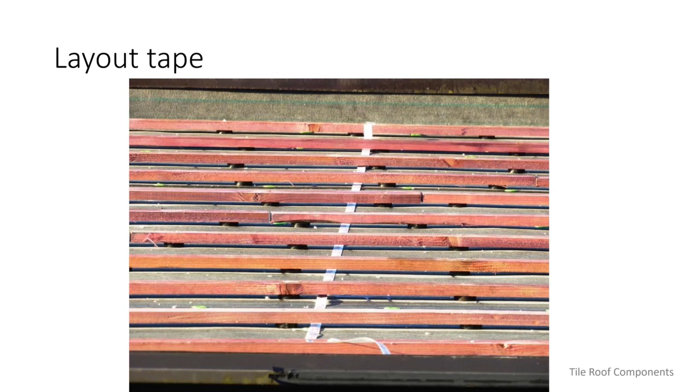So that's the components we're going to talk about. But some final thoughts on tile roofing: I love tile roofing. It's been my career now for about 25 years, totally just tile roofing.